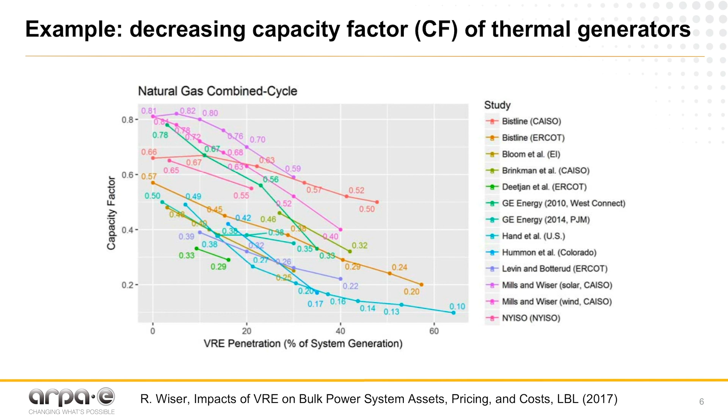So I mentioned capacity factor. Here's an example of a paper from Berkeley where they modeled, taking a range of studies, how the capacity factor of, say, a natural gas combined cycle plant might change as a function of renewable penetration. For context, I think we're currently in the US in the high teens as far as renewable penetration, and the average fleet capacity factor is about 0.58 or 0.59, kind of in the middle of that curve. As renewable penetration increases to 50% or so, the capacity factor is going to be a lot lower.

Now, NETL has cost and performance baselines for different types of power plants, including natural gas combined cycle, and they assume a capacity factor of 85% and 90% CO2 capture. Under the current NETL baselines, their capture cost for a combined cycle plant is about $72 per ton. If you take that levelized cost of electricity calculation, or the CO2 capture cost, and vary it as a function of capacity factor, as the capacity factor decreases, the cost goes up because you're essentially amortizing the capital over fewer hours. So the cost just goes up.

That's rather straightforward if you just make some assumptions. There's no particular rhyme or reason behind this, but we were just playing with numbers and said, well, let's say you could reduce the capital by 20%, and doing so resulted in a 5-point efficiency decrease. At 85% capacity factor there's really no difference from the baseline, but as you go to lower and lower capacity factors, having a lower capital but less efficient system reduces the capture cost.

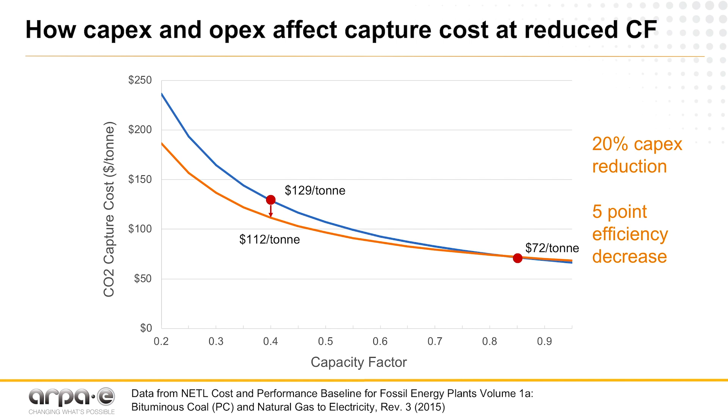At the highest level, thinking about the future, we're thinking about operations and how CapEx and OpEx trade-offs when designing CCS systems might be different going forward. That's just one example—we're going to talk about more than that, but it shows at a high level how things can change. In this case, dropping from $129 a ton to $112 per ton by just changing a few things, mostly about reducing the capital.

The way we're also thinking about this is, in a way, this is a right-sizing of CCS. Now, I'll be upfront and say these are just scenarios. This is purely schematic. We do not know how this looks, but just to give you a sense of how we're thinking about this.

How renewable penetration affects CCS and what that penetration might look like going from 30, 50, 70, or even 100%. What people have thought about today is at relatively low renewable penetration levels, they think about baseload power plants like coal and natural gas combined cycle with CCS. In the higher, say 30, 50, 70% renewables, one can imagine a CCS-equipped power plant is maybe more of a mid-merit plant. So it's ramping up and down, turning down, but still being dispatched quite a bit and still has a decent capacity factor.

But at some point, renewable penetration gets so high that the only fossil assets left might be things like simple cycle gas turbines or reciprocating engines, possibly with carbon neutral fuels, maybe with CCS. At some point, the renewable penetration gets so high that the capacity factor for a plant gets so low that the capital required to do CCS just doesn't make sense. Again, we don't know how things are going to shape out, but we're just looking at different examples for scenarios.

Different parts of CCS that we see being essentially more resilient across different scenarios include industrial CCS, probably happening across a range of renewable penetration, and negative emissions like direct air capture and BECCS, one of those things that likely happens under any scenario. So what some people have talked about is that under very, very high renewable penetrations, there could be a version where fossil assets don't actually have point source CCS, and those emissions are accounted through some kind of negative emissions. Again, this is just throwing some different scenarios out there.

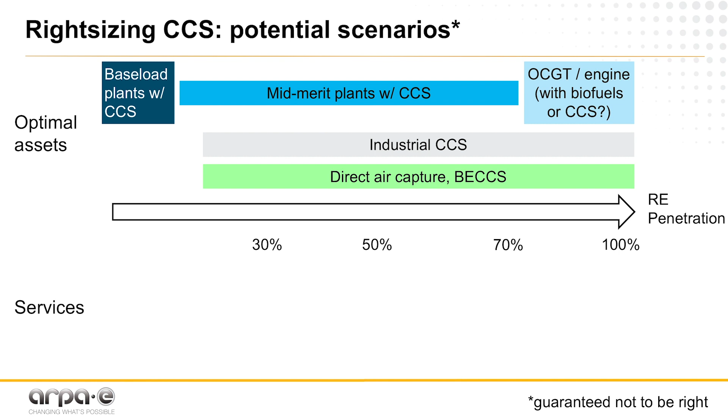We've also thought about services. Negative emissions is something that's going to be valuable regardless of renewable penetration. The power production side is interesting.

Right now, power plants have sort of a mixture of energy, capacity, and ancillary services payments. Under lower renewable penetration levels, energy matters more. As you go to higher and higher renewables, the value might shift more toward capacity. So that's one of the things we're thinking about: how those different services might vary as a function of renewable penetration, but also with a question mark around how important ancillary services are.

Right now, ancillary services for certain power plants, like in Texas, are a huge part of how they're compensated, but it's also a service that things like energy storage and demand response could supply. So we don't really know, for a CCS-equipped power plant, how important ancillary services matter, but these are the types of things we're thinking about and trying to find the services that will be valued at different points in the future.

Finally, there's a lot of discussion right now about market redesigns, capacity markets, and energy-only markets, and a huge amount of work happening, and clearly there are going to be some very large changes in how these markets operate. We're not trying to figure that out. ARPA-E's role is not to design policies and design markets, but we need to be cognizant of how those are potentially changing, while admitting that it's quite a bit off, and it's just something we want to be aware of.

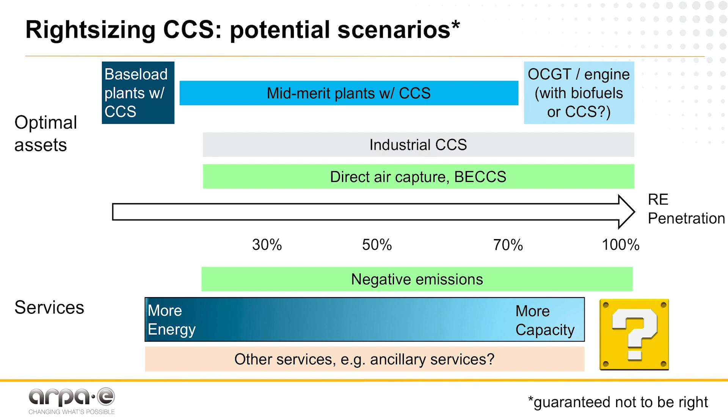So going back to this, think about how the grid affects CCS deployment. For the last 15 years, researchers have been thinking about flexible CCS. I put that in quotes because it means different things to different people. But a large part of the focus has been at renewable penetration levels maybe up to 20%, kind of more about where we are today.

People thought about regulation up: how do you increase plant output if power prices are very high? The turndown assumptions have been a bit limited. I think some plants have turned down maybe only to about 60% or so, whereas we expect future plants, especially gas plants, to turn down to a much lower level than that. And also variations on today's CCS technology.

What we're going to be talking about here is a similar kind of concept, but opening up the design space even more to reflect how aggressive renewable penetration is already happening, and how the changes are probably going to be a lot more stark than people have thought.

So here is a vision. Again, I'm calling this a potential program because we don't know if this will be a program or not. But the vision for this potential program, starting at the end, is result and impact. We want to reduce the indifference point—essentially the carbon price needed where implementing CCS makes sense rather than just operating a power plant and paying the tax. So essentially, what does it cost to implement CCS, and also the capacity payments required to break even.

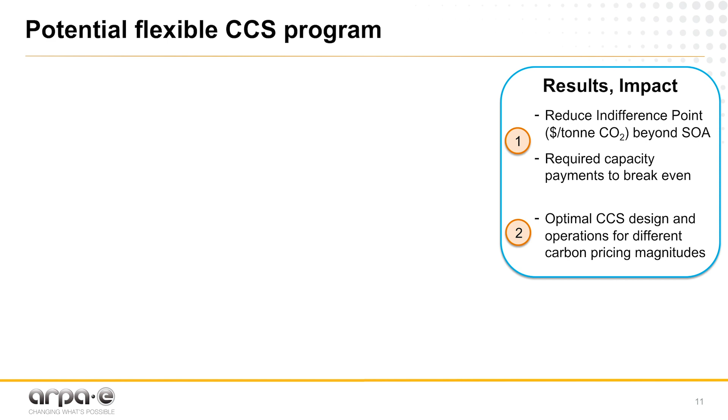The initial part is kind of called a conceptual design study. The inputs that we envision giving teams are essentially locational marginal price curves, or LMP. I'll talk about this in a few minutes, where we would essentially say, for certain regions under certain assumptions, this is how we think prices might vary.

In the middle, what we'd be asking teams to do is go through an iterative process where, starting with a high-level process flow diagram, they say, okay, I have these economic inputs—how would I change a solvent process, a sorbent process, or whatever CCS process, to better lower the cost given these variable price inputs?

And then that would involve building models—simulations of the plant, the capture unit. It would have costing components. There would be dynamic modeling to assess how the plant can change different states—when I say plant, I actually mean the CCS plant—depending on how the power plant's being dispatched. And then having design and operational variables, and doing an optimization of that to find some maximum net present value or some kind of optimization.

We envision this being iterative because a lot of the literature has sort of started with a process that looks a lot like a CCS process now, and made some changes. We'd like to open it up and say, well, if you went back to square one and asked how would I design a CCS process and operate it given these inputs—does that look any different?

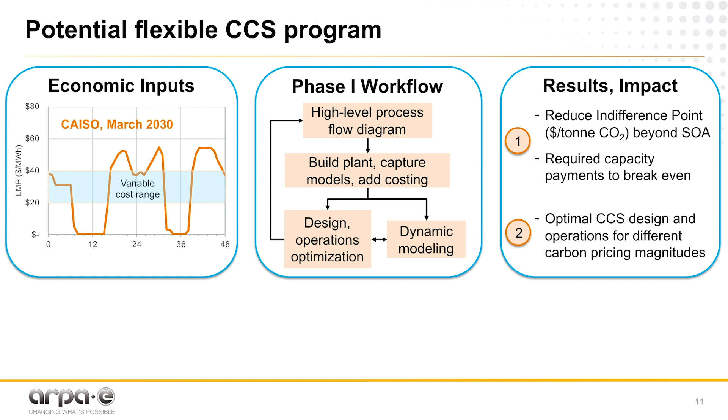So that's what we sort of see for maybe an initial, let's say, 2-year phase. And we see that the results of that could then lead to more component-level understanding of requirements. Things like, okay, I have a better sense of what kind of process would be optimal—maybe I need different heat exchanger technology, or compressors that handle variable inlets, or air separation units that are flexible, or just different kinds of capture concepts.

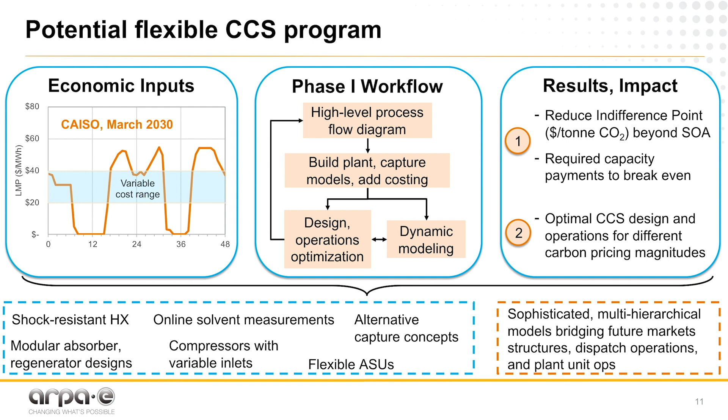And also whether there's room for thinking about more hierarchical modeling that bridges dispatch decisions made at the system operating level and what those dispatch decisions mean for power plants and even individual unit ops. So what does a decision to run a plant in a certain way mean for a certain heat exchanger in the process—are there thermal stresses that it puts on the system? Again, these are just ideas for what the outputs might be.

So what I want to talk about next is a little bit more about how power plant operations are changing. At first, some high-level ideas—something that plant operators and designers certainly think about, but I think CCS developers maybe not as much—starting with the idea that the design of a plant determines how the costs vary with respect to output.

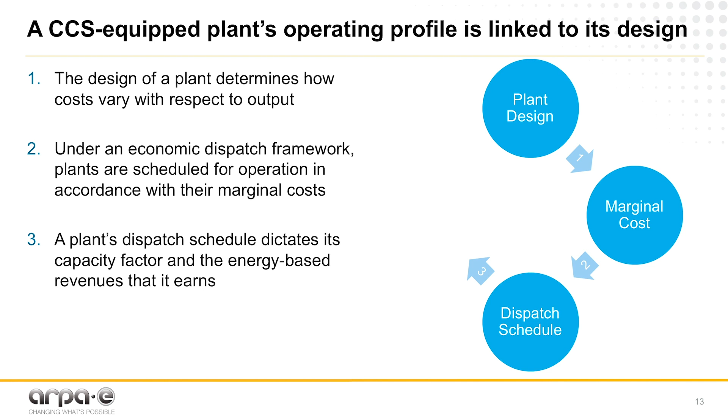There's capital cost, there's operation and maintenance costs—some of that's fixed, some of that's variable—and there's variable marginal fuel costs. And then under an economic dispatch framework, a plant has a certain marginal cost based on that design. The marginal cost determines how that plant gets dispatched, which determines how the plant gets paid.

This sort of happens again and again. It's not really an iterative cycle because you only really build the plant once, but the design and cost structure of the plant determines how it bids in the market. How it bids in the market determines the cost recovery. These are things people will have to be sensitive to when designing new plants with CCS, given all the ongoing changes, because if you make faulty assumptions, say you want a very efficient plant with a higher capital cost, depending on future electricity prices, that may or may not be a good decision.

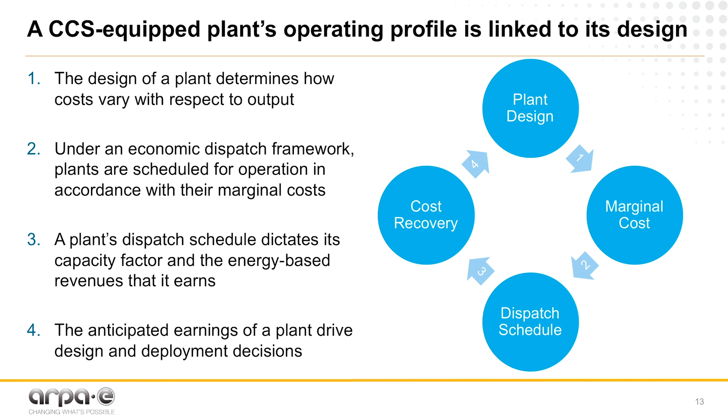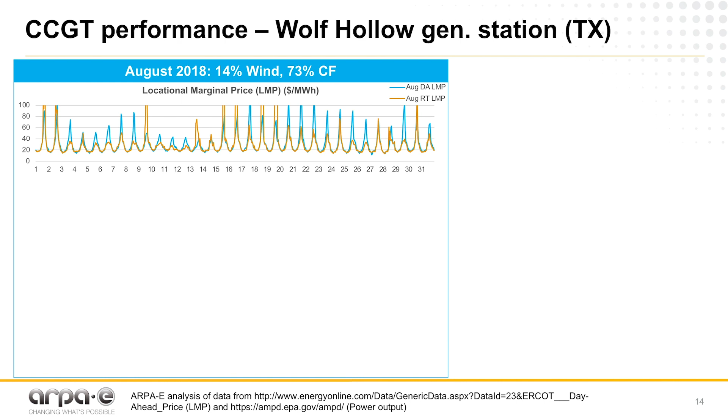I want to give an example to show how things are already changing quite a bit today. I'll show data from a power station in Texas called Wolf Hollow. This is publicly available data, and we've listed the sources below. For example, in August 2018, on average 14% of the power was coming from wind. One unit at Wolf Hollow had a 73% capacity factor. This is what the day-ahead and real-time locational marginal price looked like specifically for Wolf Hollow at that time.

What you can see is that there are diurnal swings, largely due to fluctuations in demand over the course of a day. For the marginal cost of the plant, there were times where the price of electricity, either day-ahead or real-time, was higher than the cost of the plant, and other times where the price of electricity was lower than the variable cost of the plant.

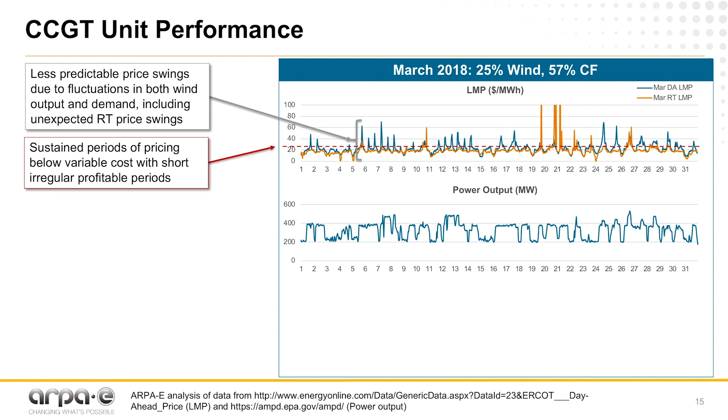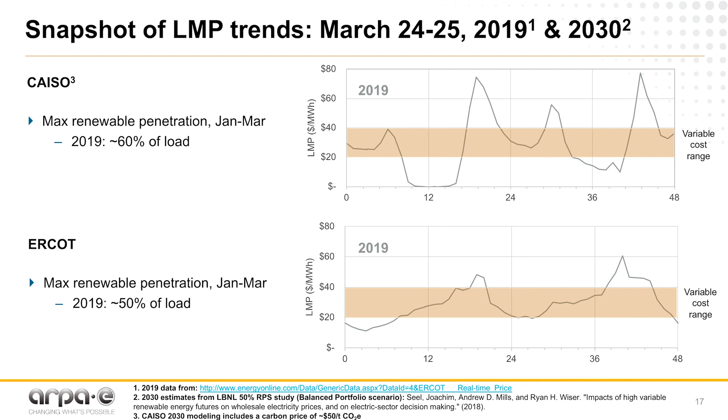Now we're thinking about what this might look like in the future with higher renewable penetration. We have current data, and also projections from 2030 from a Berkeley LBL study looking at a 50% renewable penetration scenario—I believe a balanced wind and solar output. For the California Independent System Operator, these are example price curves from 2019, and at the bottom is Texas, showing how this looked in 2019.

So those are some examples.

From the point of view of CCS, I'd like to highlight what's happening in Saskatchewan. SaskPower is already moving toward greater flexibility. In 2014, SaskPower commissioned Boundary Dam 3, which is a 150 megawatt CCS project, one of the very big demonstration projects. And in 2018, they released a feasibility study, which is publicly available, for their next potential project called Shand, which would be twice the size - a 300 megawatt project. It's at the feed stage right now.

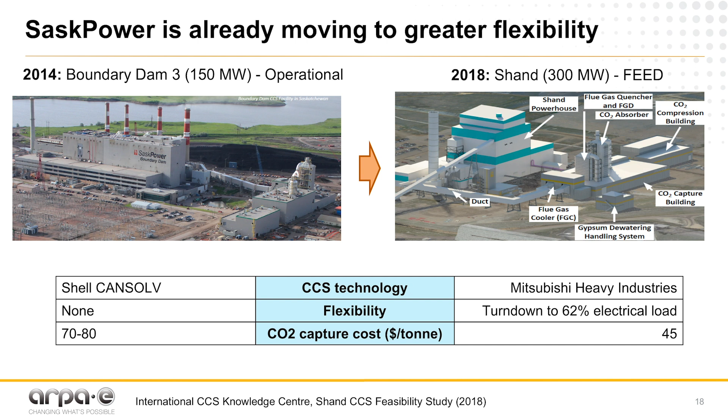So now what I'd like to talk about is - I've talked about how power plant operations are changing - what might the flexible CCS solution space look like? I want to start with some high-level principles, and this isn't rigorous. These are just some thoughts that I have, but I think they hopefully translate across a range of scenarios.

Given this type of world that I'm talking about and the trends we're seeing, CapEx matters a lot. Finding ways to minimize CapEx is going to be very important as these assets are utilized less. Some people say, well, if the capacity factor for the plant goes down, find other things for the plant to do. I'm going to talk about this in a minute.

The idea about having additional markets and having a power plant be part power plant and part chemical production facility or something like that - there's logic to that, but there's also risk. Now you have additional supply chains, you have additional markets, so there could well be some potential there, but there certainly is an amount of risk, and I'll talk about this more in a minute.

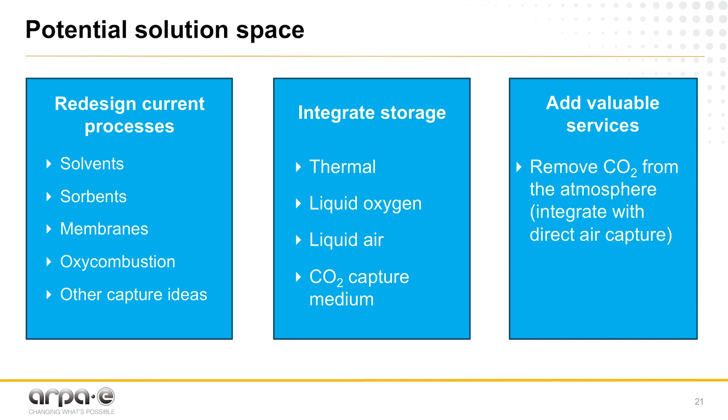And then also thinking about adding valuable services. I mentioned negative emissions being something that's going to matter. One of the things we're thinking about, and I'll talk about this more in a few minutes, is what type of integration, if any, there could be between an underutilized power plant and an underutilized point source CCS capability with a direct air capture system. Just something we started thinking about that I'll talk about.

One of the things that is probably not in scope for this program is co-production and utilization. Here's a few examples. Some people might say the power plant and the CCS plant are not going to operate flexibly because we need CO2 for enhanced oil recovery, or EOR. I'll talk about that in the near term. That probably will be the case - they probably will need the CO2 for EOR - but in the future, we're a bit less certain about that.

Some people might say, well, I can sell excess oxygen for industrial uses, use the excess electricity to make hydrogen with electrolysis, or a different idea about making hydrogen via steam methane reforming with CCS, and then use the hydrogen either in a turbine for power or for some kind of transportation. These things are important, definitely important, and in the near term, for example, EOR is going to be a very, very important part. EOR could be a longer term solution, but...

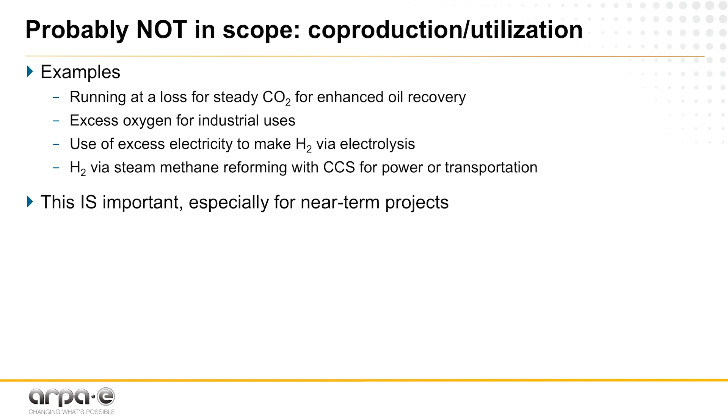We are less likely to consider co-production here, and I'll say a few reasons why. It doesn't address the main goal. The main goal is optimizing CCS to the grid of the future, and we want that to be robust across a range of things, not just something that works if there is a very large market for a particular commodity or valuable chemical, and one is getting a very high price for it. It definitely increases the primary energy consumption - so one version is choosing to operate the power plant in a less flexible way because you're making something else, and there's primary energy associated with that. It's probably also less of a fleet-wide solution, because maybe there's a certain niche market where one or two power plants are able to saturate that market because the volume of CO2 is so high.

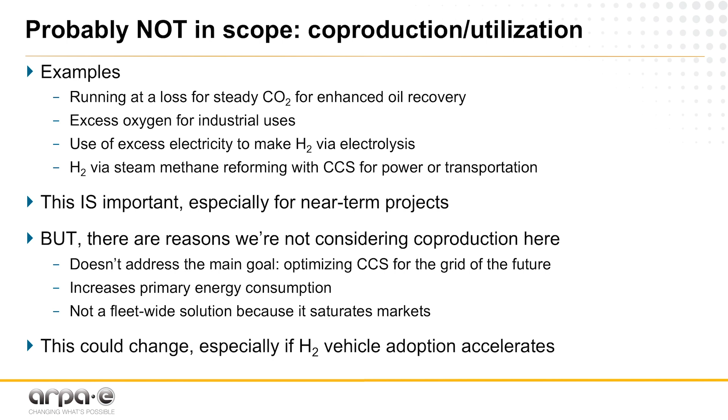So the point of all this is that co-production and utilization could be very important. If people have great ideas about how to utilize CO2, that's great. But for the purpose of this program, and the purpose of really focusing on electricity and how to minimize the cost of implementing CCS in the future, we're likely not going to consider solutions that say, I'm going to make CCS possible by having something that's partly a power plant and partly makes something else. Again, this could change, especially if something like hydrogen vehicle adoption happens and there's greater hydrogen infrastructure - this certainly could change. I'm not saying this is the right answer, but for the purposes of where we are now, this is probably not in scope.

So let's go back and think about different solutions, and let's just take, quote unquote, a standard solvent process. On the right, thinking about, given different input parameters, what kind of parameters are there to think about - and the answer is there's a lot. You could think about the lean solvent loading.

We haven't specified a CO2 removal percent, and I don't know if we necessarily would have a CO2 emissions limit. That's something we see happening through carbon pricing as that gets higher and higher. That will, in some cases, dictate the economic optimal output. And if you want less CO2, then there needs to be a higher carbon price.

Regenerator temperature and pressure could change. Lean solvent temperature at the absorber inlet. The liquid to gas ratio in the absorber will change if the plant is dispatching up and down. The liquid residence time will change.

Some people think about sizing the overall CCS system and either under- or oversizing the low pressure turbine, depending on how the steam's extracted, and the heat source. Is the steam coming from between the IP turbine and the LP turbine, or like Petra Nova in Texas, is there a dedicated cogeneration facility that's the heat source? So all these are parameters one would consider where the output of the power plant is changing. There's a lot of different things to think about.

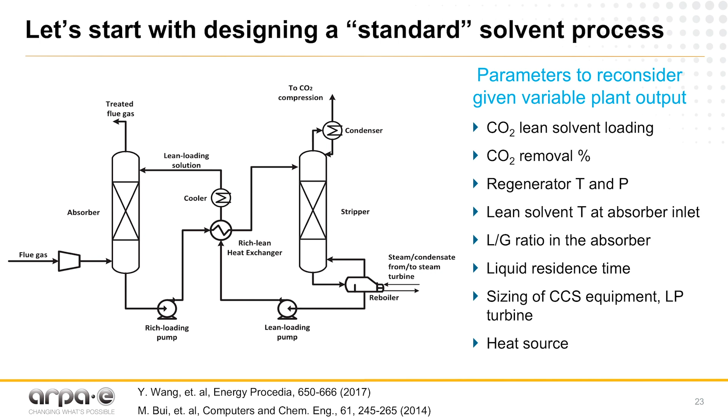I'm not the first person to talk about this. There's a healthy body of work in the literature thinking about this. Here are some examples—not exhaustive—of what people are thinking about for solvents.

Some of the earliest work in the UK was thinking about venting exhaust gas or solvent storage. There's also been ideas from the UK thinking about time-varying solvent regeneration.

For membranes, there was a recent paper from Stanford looking at varying membrane permeance, selectivity, area, and different balance of plant components, and how that affects the net present value of these systems.

Folks have thought about oxy-combustion, both in terms of arbitrage and ramping the air separation unit—running at higher levels at certain times and lower levels at others—and storing the oxygen in liquid form.

Recently, there's been work on staged pressurized oxy-combustion. There are also possibilities to hybridize with different types of capture. So there are different ideas there.

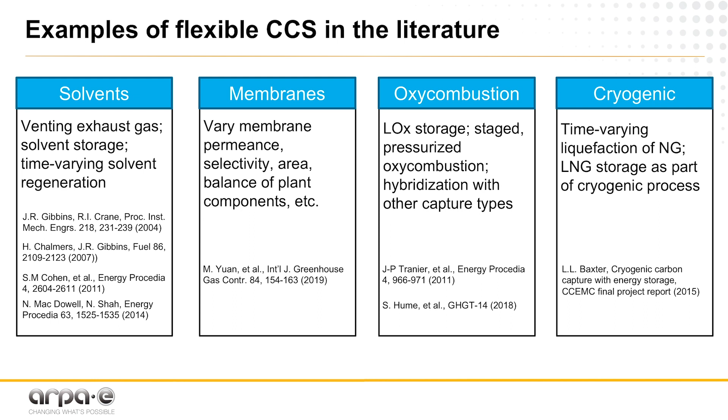There's also work that ARPA-E and others have funded, for example with Sustainable Energy Solutions, thinking about time-varying liquefaction of natural gas, where the LNG is essentially a refrigerant. The LNG storage, by varying when that happens, adds a storage component to an existing cryogenic process for separating CO2. Again, this is not comprehensive, but just examples of the types of things people have been thinking about in the literature.

I mentioned storage. One thing we're interested in is whether there's a value proposition. It's very sensitive to price swings, so if you think you'll regularly have very high power prices followed by negative power prices right after, there may be an arbitrage opportunity. In general, the feedback we've gotten is that arbitrage alone is a difficult proposition, unless storage is very cheap.

For thermal storage, this is something the ARPA-E DAYS long duration storage program addresses—there's a thermal storage component using storage media like concrete and sand. Those might be implemented more cheaply, but arbitrage alone will be difficult, and it'll become more difficult in the future because things like lithium-ion batteries are going to smooth a lot of those price swings out.

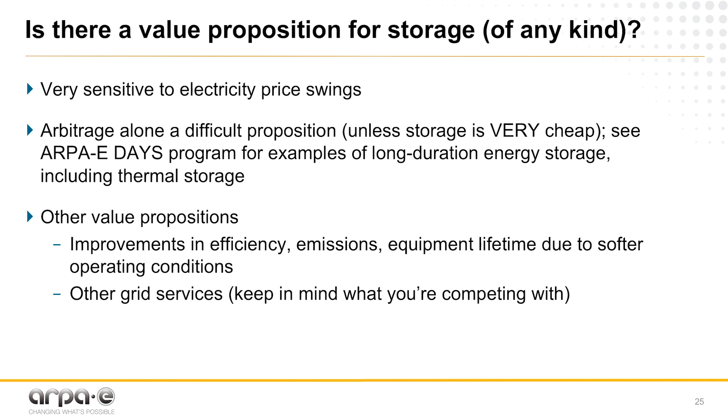But there could be other value propositions. Having storage may improve efficiency of both the capture unit and the power plant. It could impact emissions, and how equipment lifetime changes due to all this cycling. There could also be other grid services—but keep in mind what you're competing with. If you say your CCS power plant is going to provide all these ancillary services, well, lithium-ion batteries are trying to do the same thing, and demand response is trying to do the same thing, and they might be able to do it more cheaply. So think about who you're competing with.

Again, we'd love to find other areas of value that CCS could provide in the future. To be honest, I haven't fully thought this through, but I'm curious to get feedback from the community as to what integration with direct air capture might look like. I'll give you an example.

Different implementations of DAC have different electricity and thermal inputs. Some are lower temperature, some are high temperature. For carbon engineering, it's very high temperature heat, and they have essentially a dedicated turbine. They assume a certain point source CCS and a certain capture rate to offset most of the emissions from the heat needed for direct air capture.

The capture rate and the airflow are big design considerations for DAC, and different people have thought about that very differently. The question is, if you have this underutilized power plant and this CCS capability, how does that impact DAC process design? I mentioned the Shand feasibility study.

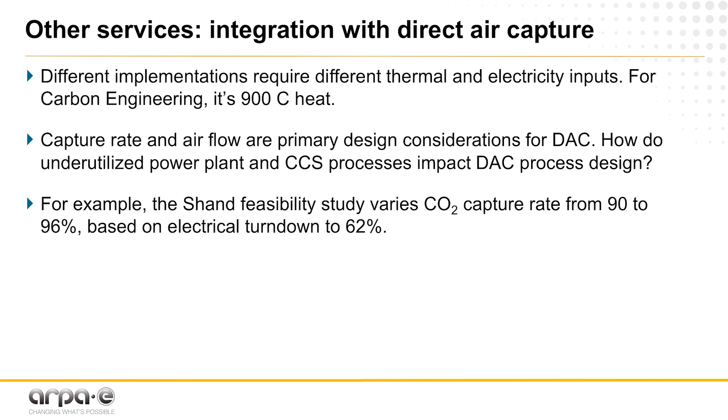For Shand, their solution to the power plant ramping is to keep the CCS part constant and increase the capture rate. Going from 100% to 62% goes from 90 to 96%. Well, if you have a power plant going from 100% down to 15%, what does that CO2 capture rate look like, and how high does it go, and how does that impact the economics and integration if that's co-located with a capture facility optimized for direct air capture? This is one of those things we just started thinking about.

Another thing I had is that earlier plot of all the different boxes and regimes of CCS for different renewable penetration levels—there's another version. This is a question we're asking: whether one would consider doing CCS on a simple cycle turbine or engine. Right now, a lot of focus has been on carbon neutral fuels, so renewable natural gas or some kind of biofuel.

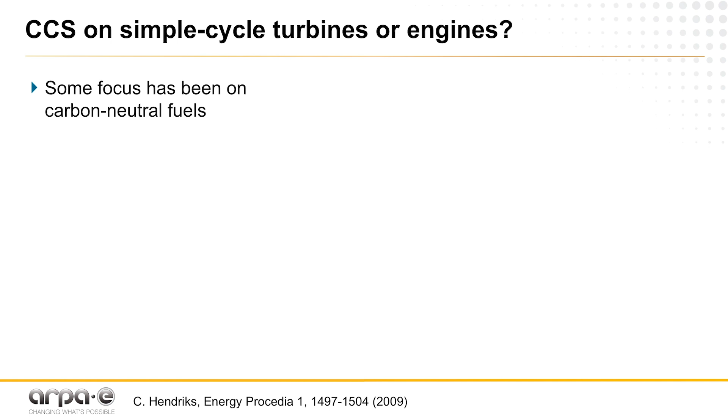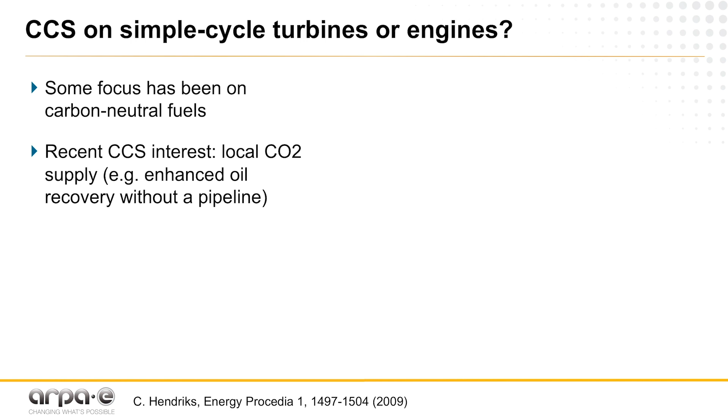For these types of assets, the capacity factor is likely to be very low. Now, when they're on at very high power prices, they still might be profitable. But given this concern about capital, it's worth asking whether we would do CCS on something with that low capacity factor. But there has been some interest and some work thinking about whether capturing CO2 from assets like reciprocating engines could be a local CO2 supply for enhanced oil recovery without having to have a pipeline.

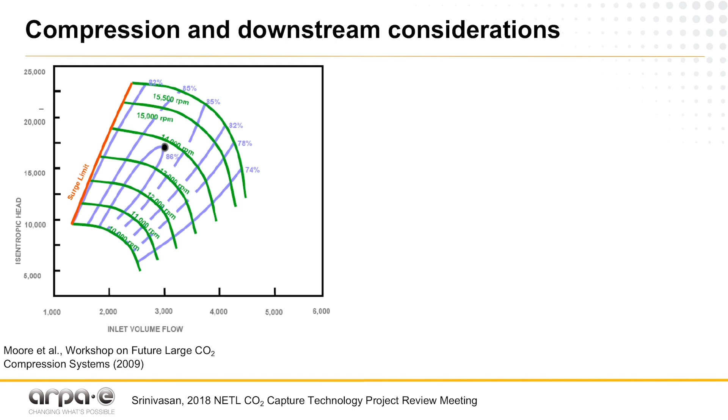The other thing is, I've been talking about capture, but for CCS it's not just capture. There are other parts like compression and downstream considerations. On the left, I show different efficiencies for different isentropic heads and volume flows for compressors. NETL has been funding research on compressors, focused on getting to higher pressure ratios, say from 2-to-1 up to 10-to-1, to reduce the number of stages and move to higher quality heat rather than having a lot of stages and intercoolers between each one.

Now, you might be able to have modular compressor trains and deal with it that way, but one of the things we're thinking about is how these flexible operations and changing mass flow rates of CO2 affect compressors—we're certainly interested in the implications. Again, you can handle this with multiple compressor trains, but what are the capital requirements to do so?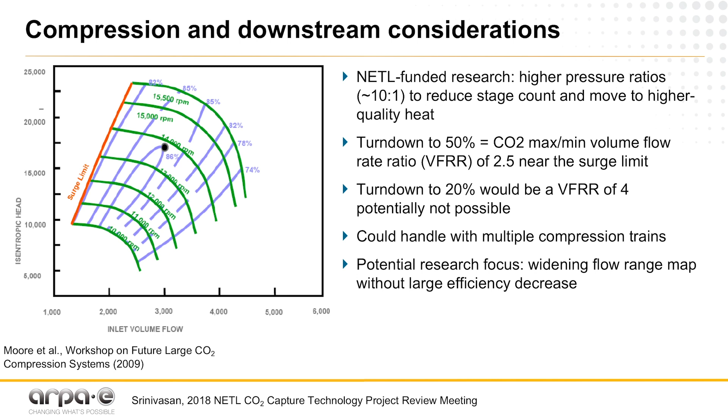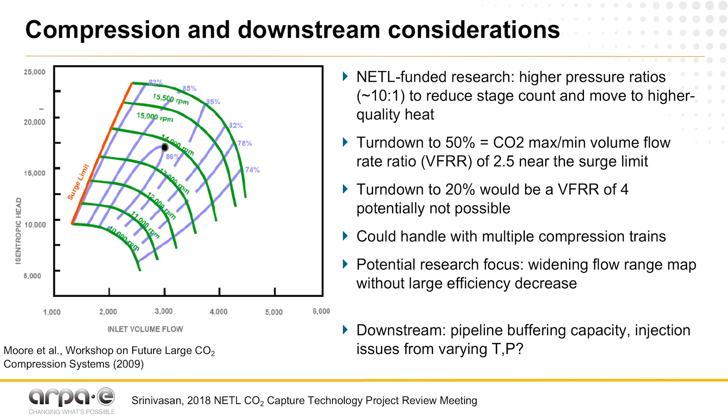A potential research focus could be this map on the left—could you widen the range, essentially achieving higher efficiency over a larger operational range? Again, it's a question. There are also downstream effects too, so there are questions around the pipeline: to what degree can the mass flow into the pipeline change? Does the pipeline have some inherent buffering capacity? And do changes in temperature and pressure with mass flow rates cause any issues with injection? These are questions that we have.

I'm going to spend a few minutes on plant dynamics. This data is the same data I showed you earlier from the Wolf Hollow generating station, showing diurnal cycling. On the right, we show additional headroom and footroom that happens with CCS. The blue curve here is the power plant.

If you have a CCS unit operating at normal conditions, for a 600 plus megawatt plant, there's about 65 megawatts in parasitics associated with lower power output from the steam turbine, parasitics from the capture process, and power required for the compressors. If you turn that off, this is additional headroom.

This is the exhaust gas venting idea, where a trader might look at this plant and say: tomorrow I'm expecting very high power prices at certain times of the day, so I'm going to plan to turn off the capture unit. I'll pay the CO2 price, but gladly so, because I'm capturing a very high electricity price that I'm expecting.

Conversely, it also gives you the possibility of additional footroom, but there are some caveats, like depending on how the low pressure turbine is cycled, or how the regenerator is cycled. If you're doing solvent storage, there could be a scenario where the power price is very low and you want to turn down the plant as low as possible. It might be possible to lower the output to the grid even more by running at a higher parasitic load and running more steam through a larger regenerator to dial the plant down even more.

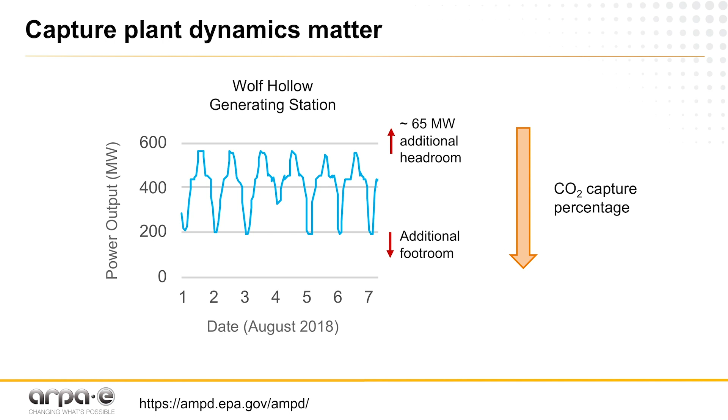There's been plenty of work on dynamic models of both the power plant and the CCS unit. To my knowledge, they're pretty much only for amine solvents. There's a 2014 review that highlighted different work done with different types of models. There's a range of software out there.

There are some more recent examples I've cited, papers in the literature from 2016 and 2018, that talk about not just dynamic models but also trying to get dynamic data about pilot CCS plants, and how their performance changes with different dynamic operation. It's been really valuable.

At the bottom, I have some broad conclusions. A lot of these papers have many different parameters to optimize, but I think the conclusion has been that the capture plant generally can load follow and handle a range of power plant operation schemes. So it's not to say CCS somehow inhibits flexible operation of the plant, or that the CCS plant cannot operate flexibly by itself.

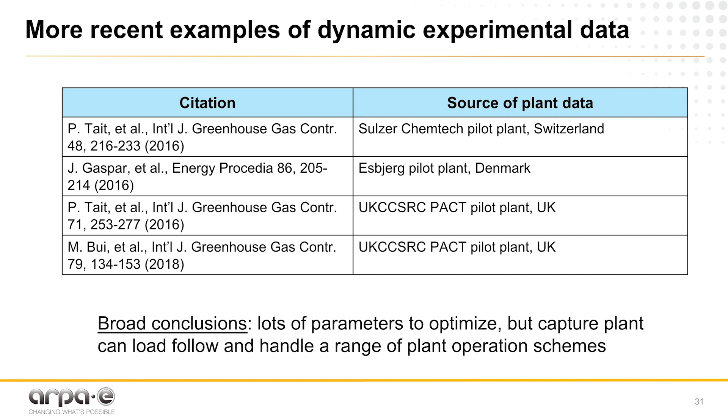That's the conclusion, but there certainly are a lot of parameters to optimize and a lot of things to think about. So to bring this all together, what we see happening is teams coming together and saying we are going to build a model for a power plant, capture unit, compression, and we are somehow going to validate that. Thinking about how those models get validated, and then adding costing, like capital, fixed O&M, marginal cost.

Then having grid economics, so we would likely supply the electricity prices, say here are some representative prices, and then teams would figure out, based on those prices, how might a plant dispatch. And then also have dynamic and physical limitation considerations. Does the plant dispatch break the capture process because it can't handle such a large change in CO2 mass flow rates? What does it mean for the compressors? Are there downstream considerations? Taking all those different things, the ultimate point is to optimize and say, for a wide range of design variables and operational variables, how do I optimize the net present value given all these constraints?

So a few last things, talking about potential program outputs and the impact that we might have. Here's a paper from Stanford, pretty recent, thinking about flexible operation of a membrane process. And this was a plot where they show the impact. And I think one of the ways we're thinking about how ARPA-E might have an impact is first thinking about what we're calling the indifference point.

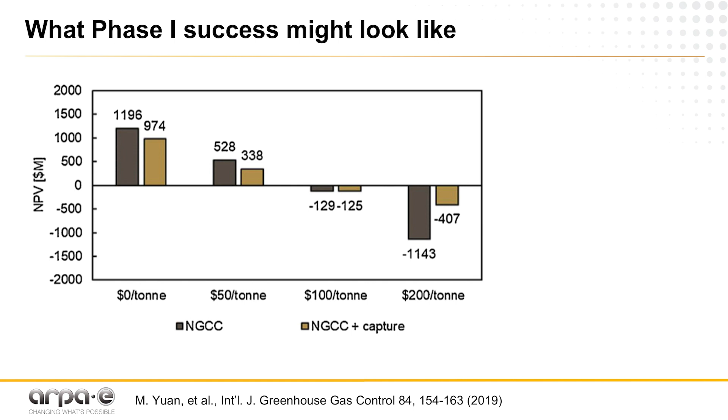This is the point where the net present value of a plant with and without CCS are the same. So essentially, this is the point when you say, okay, maybe I'll start thinking about doing CCS, because at a lower price it doesn't make sense. Here, the authors found basically about $100 a ton to make this work. We're asking what can researchers do to move that to a lower level, so that from a policy point of view, if someone says how high a carbon price do I need to actually do CCS, it's not as high a value. So moving that to a lower indifference point where CCS makes sense.

The other way to think about it is increasing the net present value. So as part of this paper, the authors realized that if they took 2015 California price data, they concluded that by itself, even without CCS, the power plant, just the combined cycle plant, did not have a positive NPV. And this gets back to plants being compensated for energy, capacity, and ancillary services. So what they did in the paper is they just multiplied the historical prices by 2 just to get a positive NPV somewhere. They just said the point of this is to prove the viability of the optimization that they were doing.

What we would think about is we wouldn't necessarily change the prices. We would say, okay, if even without CCS the power plant's in the red, so be it, but what kind of capacity payments would the plant require in order to break even? So the indifference point is one thing, but also just the overall magnitude of the NPV, very negative and less negative, that would give some information as to how much additional capacity payments would look like for a plant to break even.

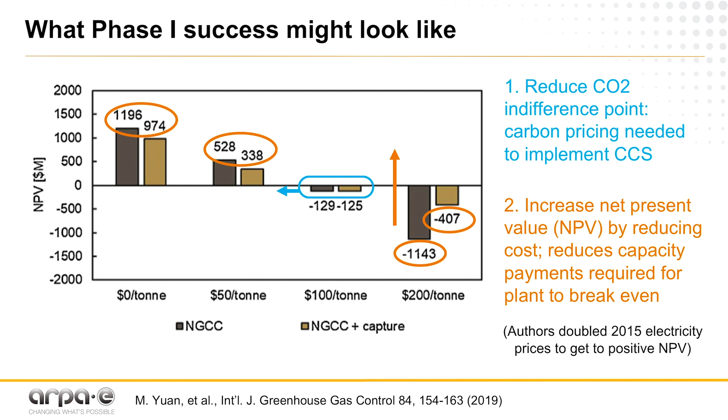So for right now, that's what we're thinking the output might be, but we're happy to get feedback on that. The broader impact, and the point really here, is we want to reduce the cost of deep decarbonization.

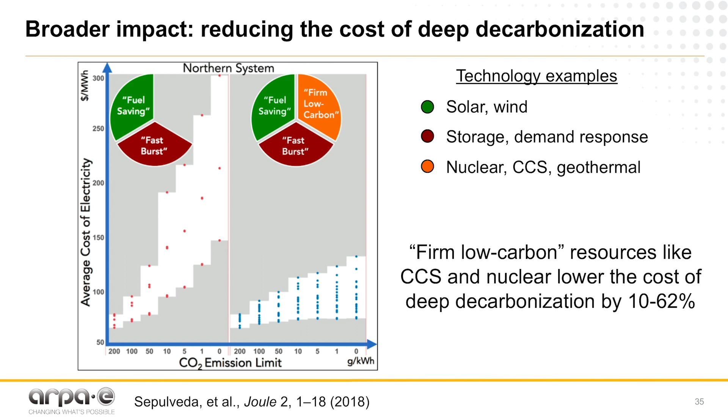In a different scenario, if you have those things, but you also have firm low carbon power like nuclear, CCS, or geothermal, at the higher CO2 intensities they're pretty similar between the scenarios. But as you go closer and closer to zero carbon power, the cost of electricity is a lot lower and the uncertainty is a lot lower. So what the authors concluded is that having things like CCS and nuclear could lower the cost of decarbonization by 10 to 62%, which would be an enormous savings.

I've had some ideas about what the value proposition of CCS is going to be, but we want more open input. Put differently, why would somebody want to do CCS? What's the value in doing so?

Is there anything we're missing on the economic inputs to get teams started? Ideally, we'd like to give one set of conditions to all teams, so everyone's starting off on an equal footing, and then they take those conditions and optimize and do different things.

What's the appropriate length and frequency of electricity price data? We can say here's one price curve that might be true for one day of one year. We'd like to have different scenarios to be more robust, but that's also computationally intensive. So what is the most essential set of price inputs that we can give that's still computationally manageable? That's something we'd like input on.

I've talked a lot about natural gas combined cycle plants, and that's kind of been our baseline. The question is whether the scope should be limited to only that, or open to a wider range of point sources, even including industrial sources. Industrial CCS is something that interests us, and we'd certainly like to come up with a methodology applicable to other areas. But from the point of view of a program right now, is it better to focus on just one type of power plant, or leave that more open for teams to think about?

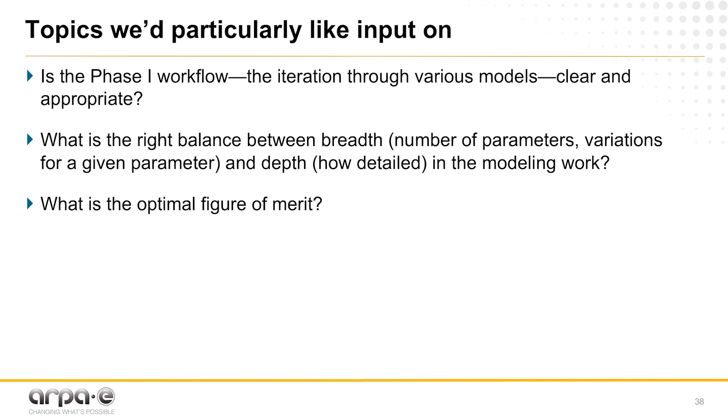What's the optimal figure of merit? I've talked about CO2 capture price. Some people have talked about CO2 avoided, which usually should include transport and storage. Some people, if it's direct air capture, talk about dollars per ton removed. So I've talked about CO2 costs in different ways. Some people would use levelized cost of electricity or net present value. Is there a certain figure of merit that is more optimal across a range of scenarios?

One question is how to compare technologies with different amounts of data and dynamic models. Let's say, for example, one team is working on an amine, MEA—there's physical property data, dynamic models, dynamic data, there's a lot. And if another team is working on a more nascent capture technology, one that's promising and could be very flexible, how would we compare something that has a lot of existing data and models versus something that's newer?

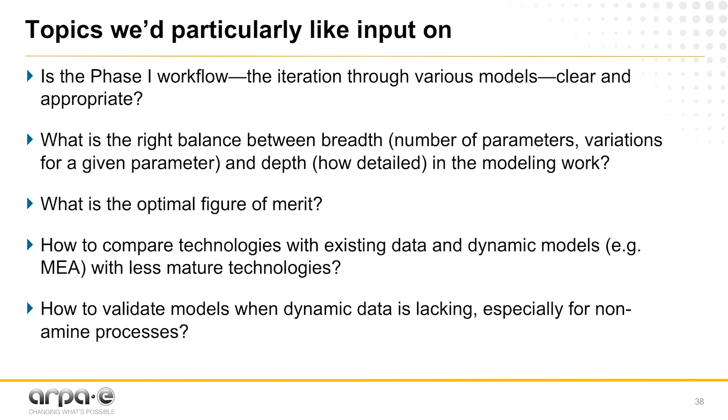And along the same line, how do you validate models when dynamic data is lacking? If there's no pilot plant or large plant operating on a sorbent process, a membrane process, or something else—if there's not a lot of dynamic data—how do we handle dynamic models? So those are a lot of different thoughts.